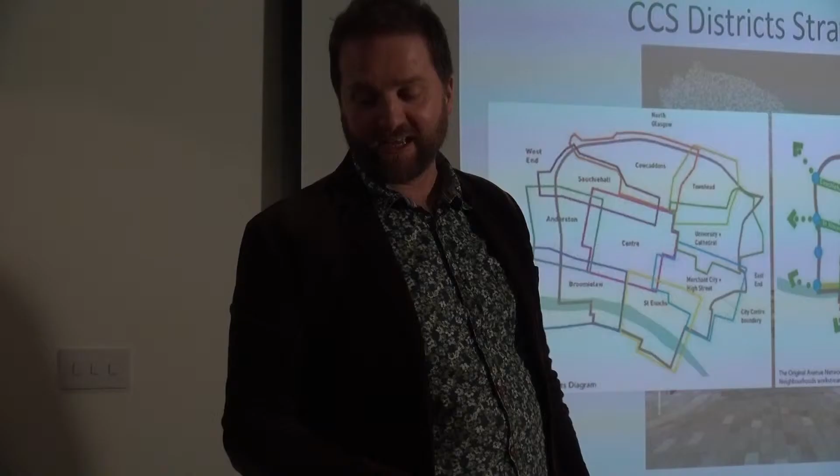If we come back to the origins of this project activity, it actually stems back. These are the original drawings from a workshop in November 2012 that we held, and these formulated a workstream report that was never published, that then became one of the foundations of what is, sorry, this is a PDF, so you would have seen on the backdrop here the City Centre strategy document.

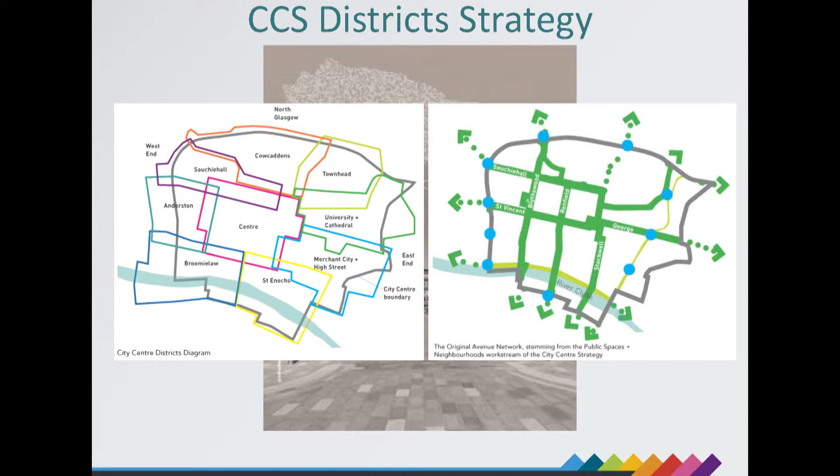So we actually work within the City Centre strategy 2014 to 19 document. That document and that activity looked at delivering 2 elements across the city centre. First of all, we came up with this concept of 9 districts. We're undertaking district regeneration frameworks for each of these districts.

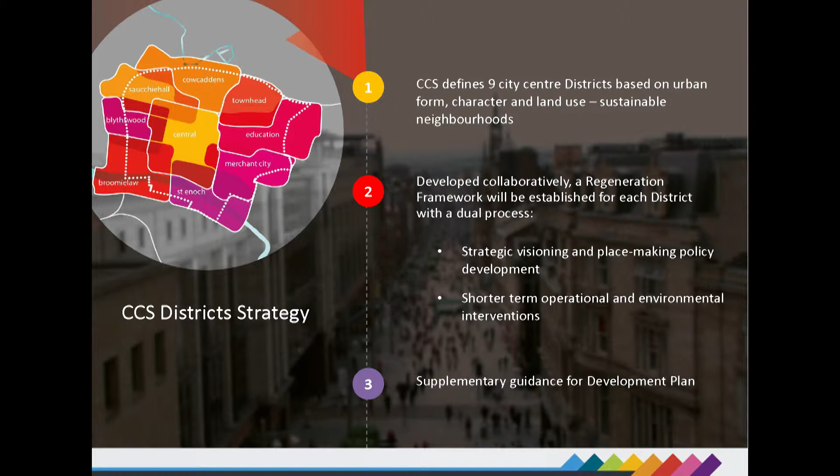They feed into the local development framework, strategic development framework for the core city centre that then feeds into the local development plan. It's a very interesting aspect because it's the first time for us in Glasgow that we actually have a sort of operations infrastructure activity that's being coordinated but also working in parallel and in conjunction with the city centre strategy team, delivering on the placemaking, policies, strategic

drivers that then feed into the local development plan. So we have this meshing of practical activity on the ground that's backed up with all the policies and strategies at a city, regional and national level, certainly for the Avenues programme.

What that means, people-focused placemaking agenda, integrated with key strategies that I've just mentioned. We are fundamentally responding to investor requirements that pushed for an enhancement to the city centre. It's all about placemaking, it's all about improved public realm. By default, we're delivering on segregated cycle lanes, we're also delivering on green infrastructure, and we're currently delivering on smart

city infrastructure. What I mean by that is that we have a thematic project, the Intelligent Street Lighting project, where we are next month delivering on the LED rollout for the core city centre. That's 3,500 luminaires in the core city centre, but the important aspect is that we're also delivering on a central management system, which by default is a secure wireless canopy.

So that provides us with the secure comms network that allows us to plug and go with a myriad of sensors or do what we like. In essence, we have a network where you could in essence control all the street furniture, movement of traffic, etc. within the core city centre. We're not going to do that, that's a wee bit too far at the moment.

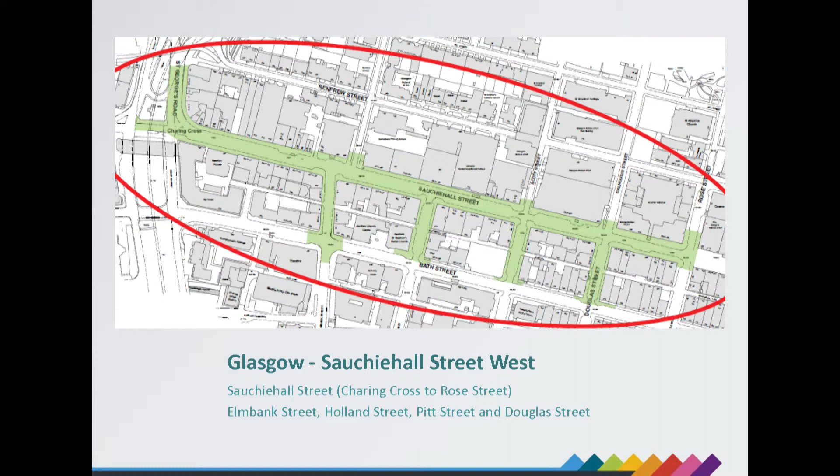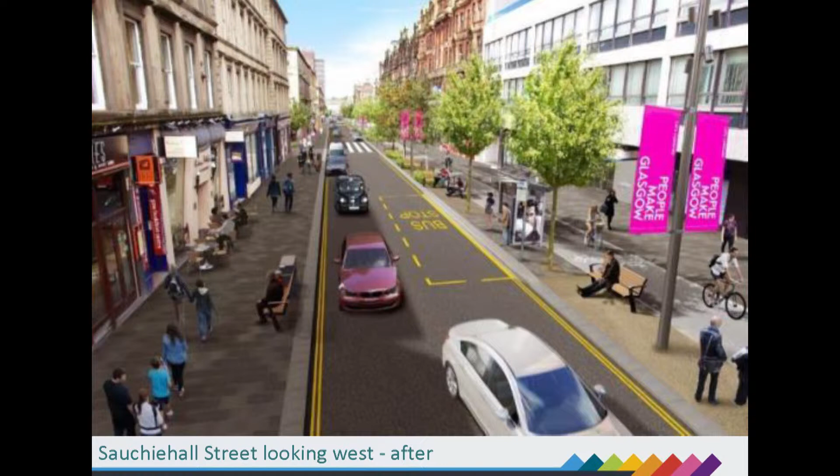That is what we were faced with. People have forgotten that image already. Going back 3 years, the key element is the white line in the middle. What we suggested was 4.5 metres of footway, 6.5 metres of carriageway, 3 metres of service verge with street trees, 3 metres of segregated cycle lane, and 4.5 metres of footway. That's what we pushed for.

Our game is all about space reallocation. We're trying to win back the space of the streets with the hierarchy approach: people first, cyclists, public transport, then everybody else. So that's what we proposed.

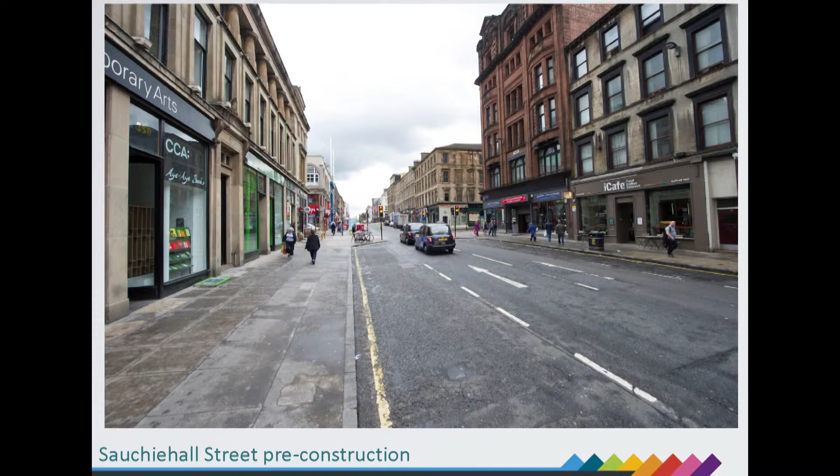Apart from, some of you would have noticed we skipped on the rain gardens - that was a step too far. I had to accept for my wider colleagues in the Glasgow family that this is a journey we're on, and this was the first avenue, the pilot avenue.

So rain gardens was a step too far, but we did introduce something called drain joints - we made the Caithness flag permeable with the joining between the slabs. The trees have 18 cubic metres of uncompacted soil below ground. The rooting zones start just short of the curb line and come into the cycleway, now by default continuous trenching on each block where you see trees. That is a major win for this city.

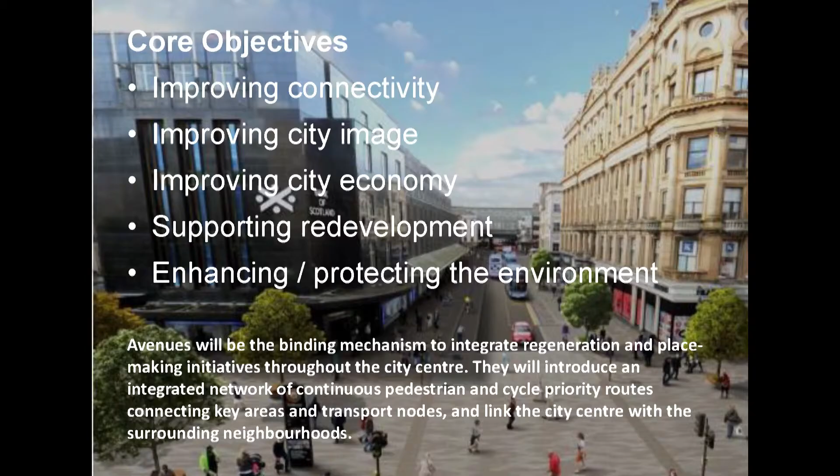Buchanan Street is still second only to London West End in terms of retail spend profile, yet we're facing about a 20% drop in spend profile over the next 10 years. So it's fundamentally important that we enhance the experience of the city centre so we maintain the volumes of people coming in and staying for restaurants, pubs, culture, and ultimately spending more money.

So when we suddenly got the 115 million - and it wasn't as easy as I'm making it out - it was a 3-year process of going through, narrowing down from 80 odd projects to about 20 that finally passed the post for funding.

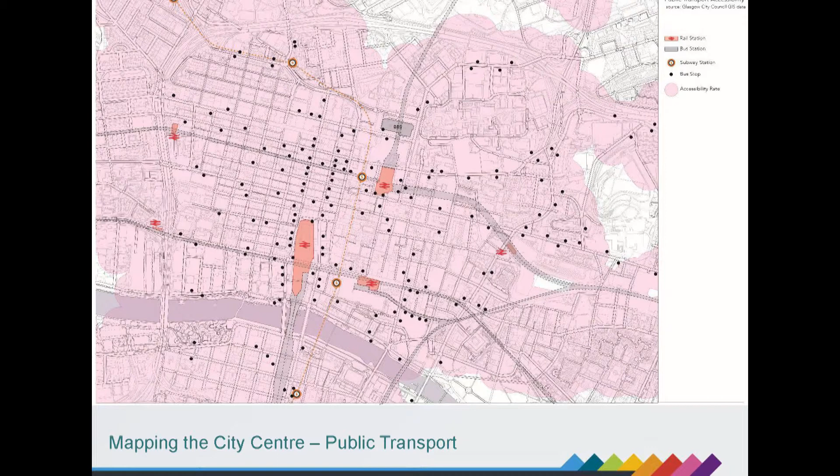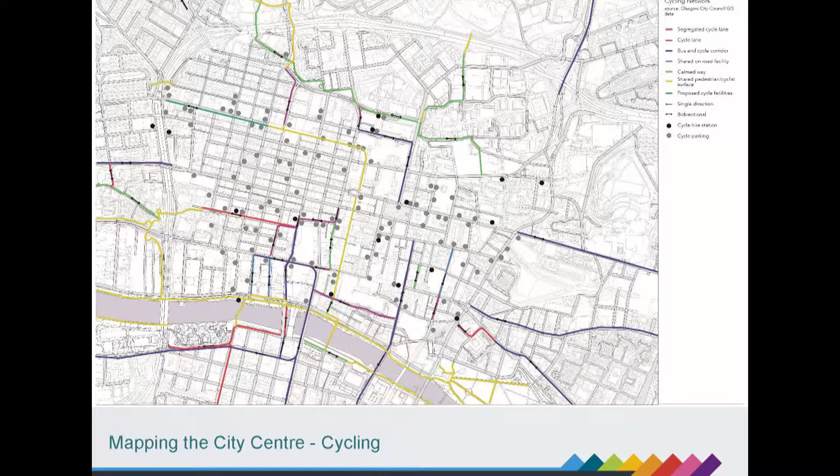We actually did something slightly different. We stood back and asked: what have we proposed, how are we going to deliver this? So we engaged Urban Movement, who looked quickly at the city centre environment - public transport, cycling, buses, air quality, and a whole myriad of factors.

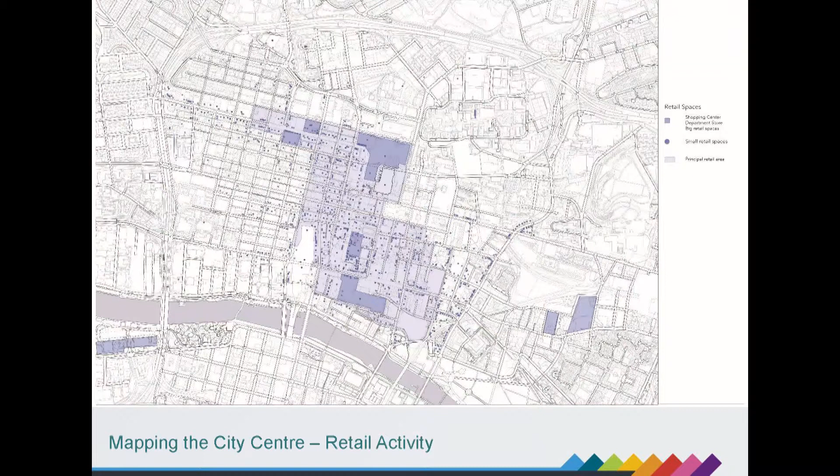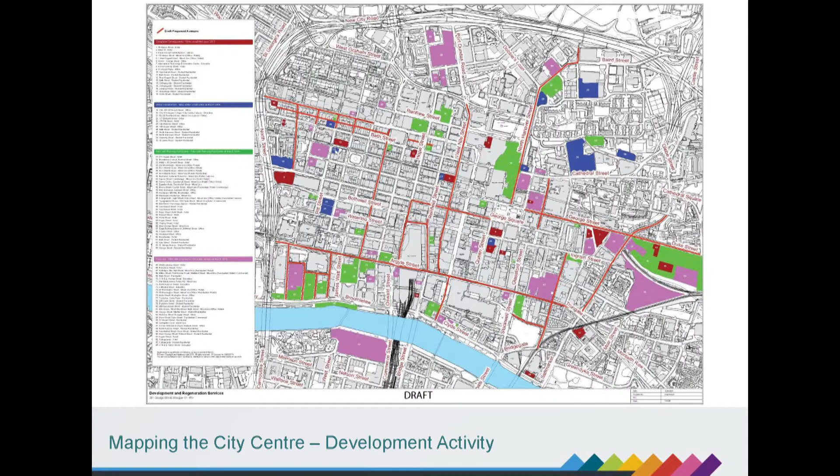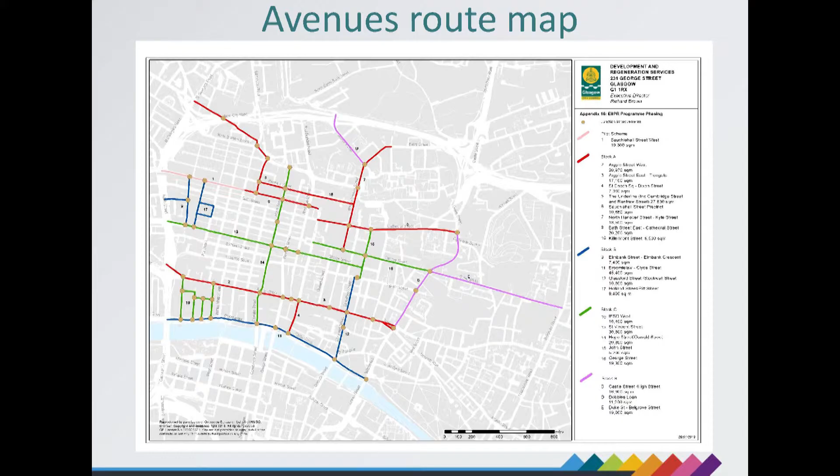This is from 2014 with some key avenues under the city centre transport strategy, and finally today - apologies for this poor slide - that's what we now have. Everything in blue, red and green is being delivered, and the extra purple, which we've added, with one missing here, is subject to an external funding bid - a sneaky little bid to Sustrans for about 20 odd million. I'll find out in June if we're successful.

So, key actions - remember that: better streets for walking, cycling, attractive spaces to be in and stay in, and also, importantly, climate resilience. We are delivering on climate adaptation.

Very quickly, running through some design elements that come into play here: Healthy Streets. We're fundamentally delivering on the Healthy Streets agenda. This stems from Lucy's work with TfL down in London, now becoming recognised across the wider UK to such an extent that this year, 9th and 10th of October, the Healthy Streets Conference is coming to Glasgow.

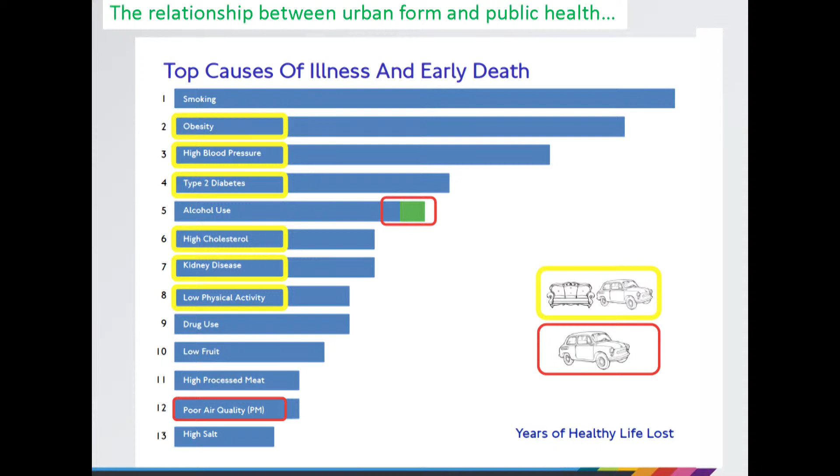A key element for me on the Healthy Streets agenda is identifying top causes of illness and early death. What's interesting is that obesity, high blood pressure, type 2 diabetes, high cholesterol, kidney disease and low physical activity actually equate to more than poor air quality and particulate matter. So following the Healthy Streets agenda and the delivery we're doing with active travel, we could actually hit many of these top spend profiles.

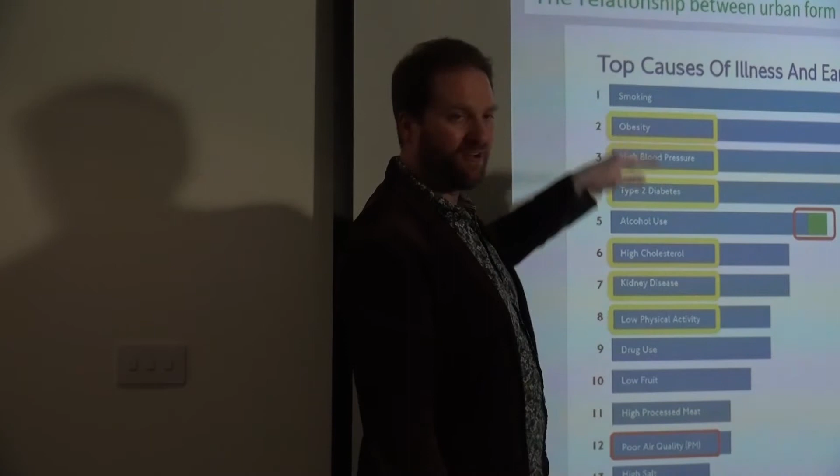This relates back to work done about 8-9 years ago by NICE, who first identified that for every £1 spent on cycling infrastructure, it would actually save £37 to the NHS budgets. So we're really pushing that messaging.

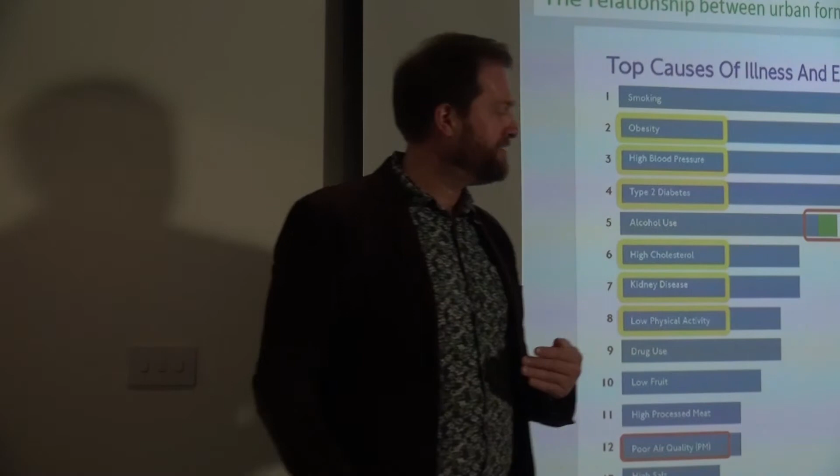Running on the back of the avenues, we have a £1 million NERC bid currently in process, which will allow the Institute of Occupational Medicine and Glasgow Centre for Population Health to monitor us over 10 years to see if we're actually delivering what we're intending to deliver, and our core ethos in terms of achieving that modal shift within the Glasgow context.

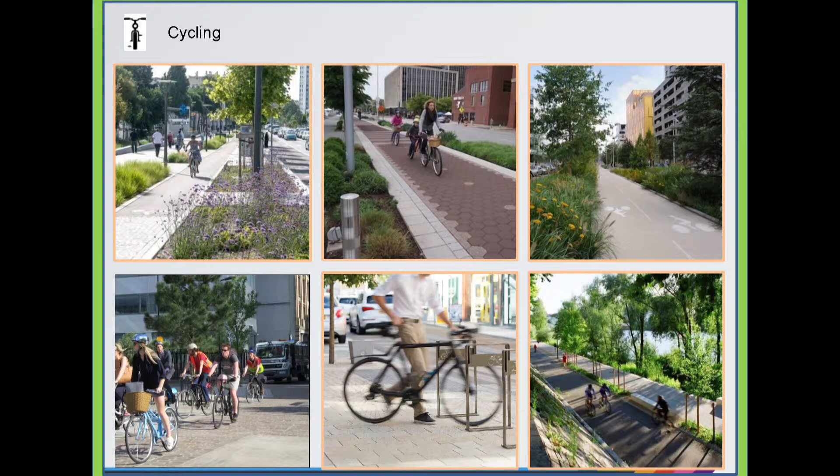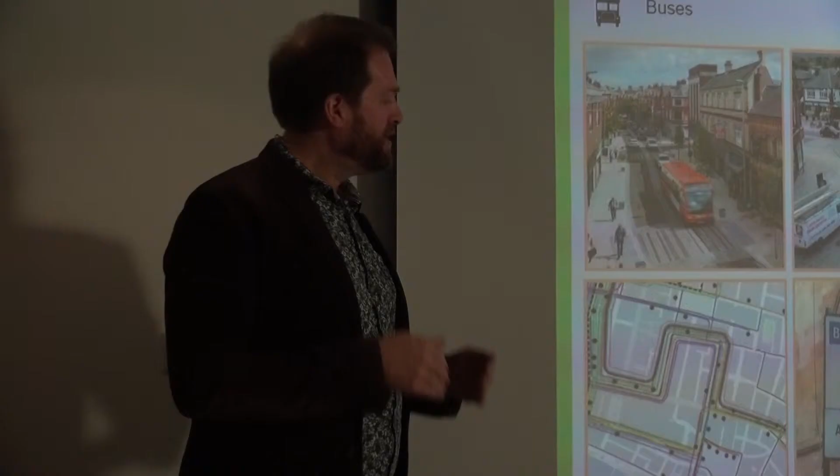Buses — it's so important that all of our work crosses over with the public transport network. We're not going to be like Edinburgh; I doubt very much we're going to get a tram. So it's the surface bus fleet that we must work with, improve and connect with.

Cycling, what works? There's a neat little report called SPICe published by the Scottish Parliament last year, and we focus on this because somewhere in there it talks about space reallocation. There has to be a willingness to reallocate road and parking space to cycling infrastructure. We take that further — cycling infrastructure, but also pedestrian first.

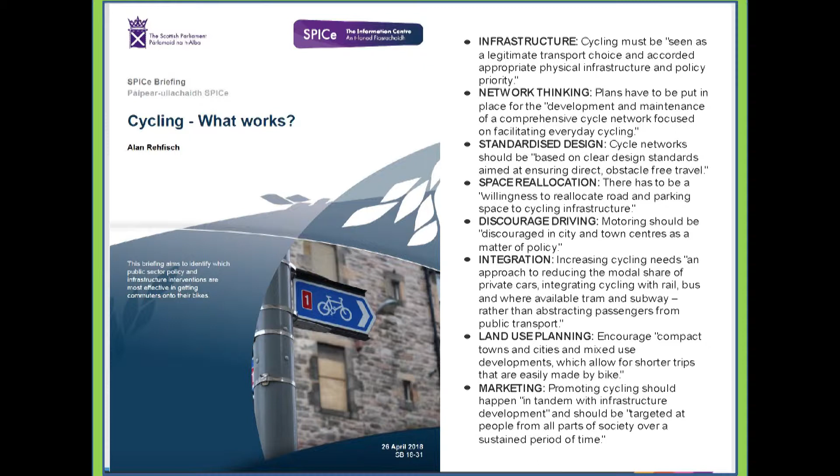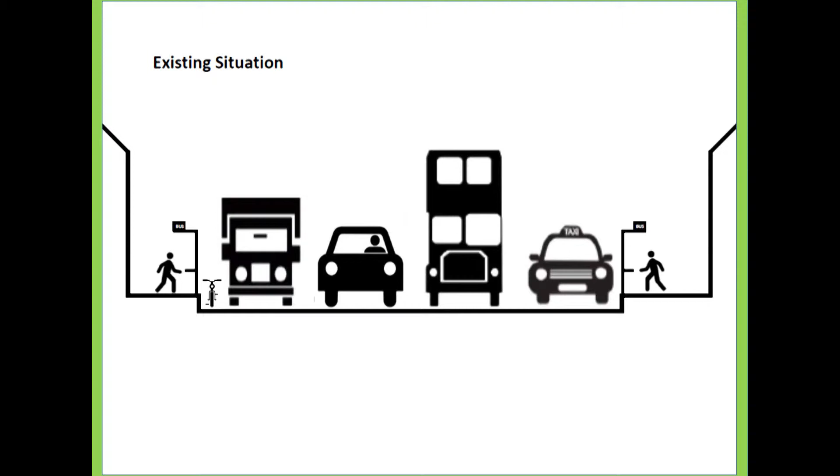This is how all these slides about speed, geometry, etc. work. Existing situation — this is from Argyle Street — and this is what we're taking it to, where we're narrowing it down. I have the go-ahead for the concept design for Argyle Street, shown on our website, glasgow.gov.uk/avenues, where we're demonstrating that we're designing across the board on the avenues for 15 miles per hour.

Now legally you can only enforce 20 miles an hour, but we're taking our design speed as being 15 miles an hour. Case studies — Poynton, 26,000 vehicles, you've seen all that strip I'm sure. Walking is a key element of our activity, as I've mentioned.

Street life. Design development — apologies, I'm racing through this. Design development, case studies, study trips, pilot schemes, following design standards and guidance, following policy, adopted design strategies, specific issue research, investigation — all of that is the activity that we're doing.

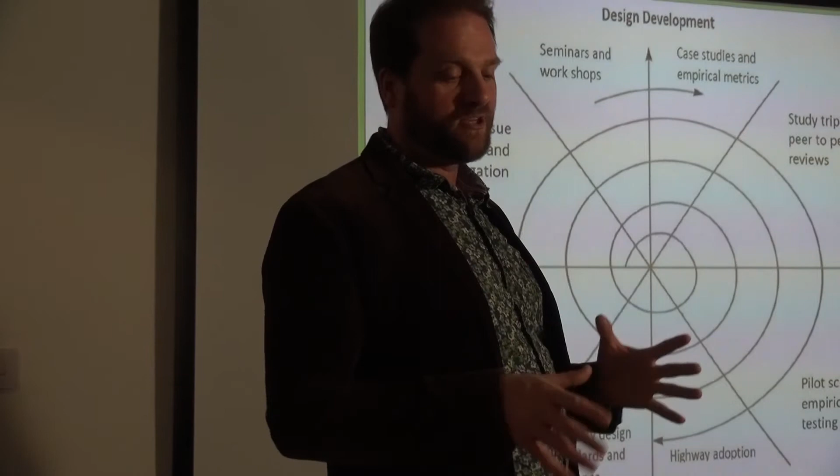I am not a road engineer and I'm not a designer. My professional background is ecology — I'm an ecologist as a professional, but I've had quite a number of years working in development activity. So for me, simply because of my own background, I rely totally on guidance and evidence. Every decision we take within the Avenues programme is evidence-based. I ask everybody to follow respective guidance and respective evidence.

And it is actually out there, because the nuances in a lot of our discussion and debate with our collective teams, even within the design teams, let alone our colleagues in the wider council service, it's all about the nuances of interpretation of that guidance. Because the guidance is there to deliver what we are delivering within the avenues.

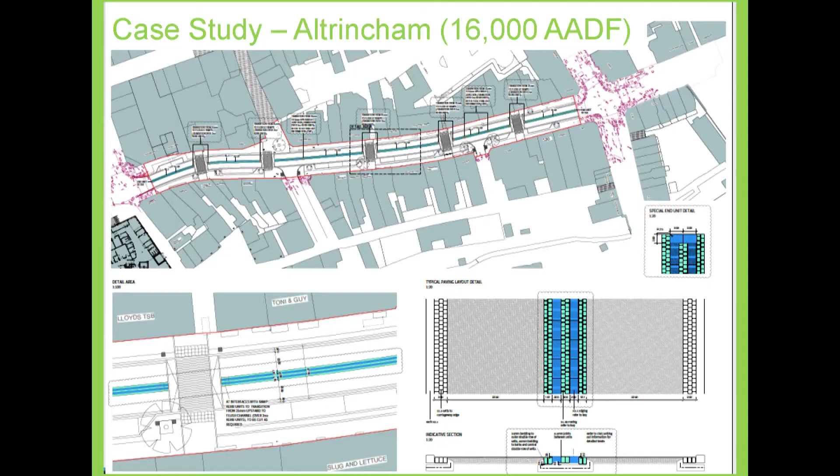Altrincham is a good one — a 6.5 metre carriageway in Altrincham for about 16,000 vehicles a day. I mention this because the proposal for Argyle Street is that we're taking the complete length of Argyle Street from Junction 19 to Glasgow Cross, actually to Moir Street beyond Glasgow Cross, down to 6.5 metres of carriageway. That's it, end of story.

And like Altrincham, it'll have a central rib, so we're telling the driver you have to slow down even further. So that concept design is now being taken forward for stage 3 and 4.

A key element for me is inclusive design — we're designing for all. So we've had discussions and debate with various vulnerable user groups, and we've set up an overarching steering group to undertake the equality impact assessments. These are members of that team. So quickly, I've mentioned Argyle Street.

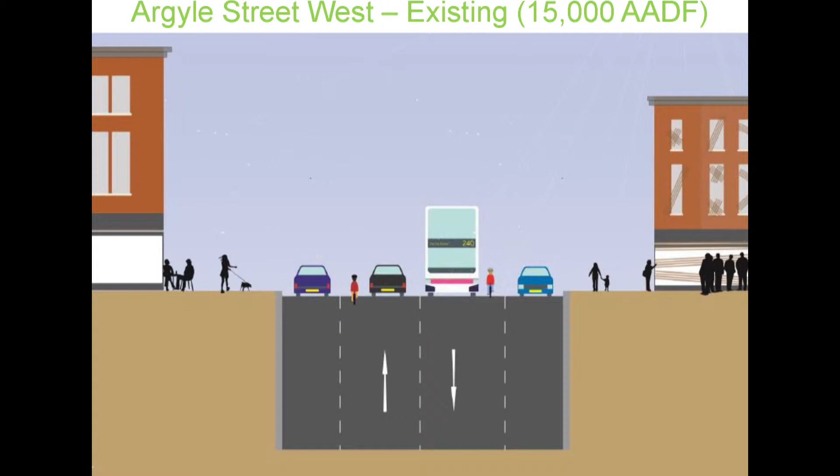That's what we're looking at doing. What does that look like? This isn't such a great visualization, they're being updated.

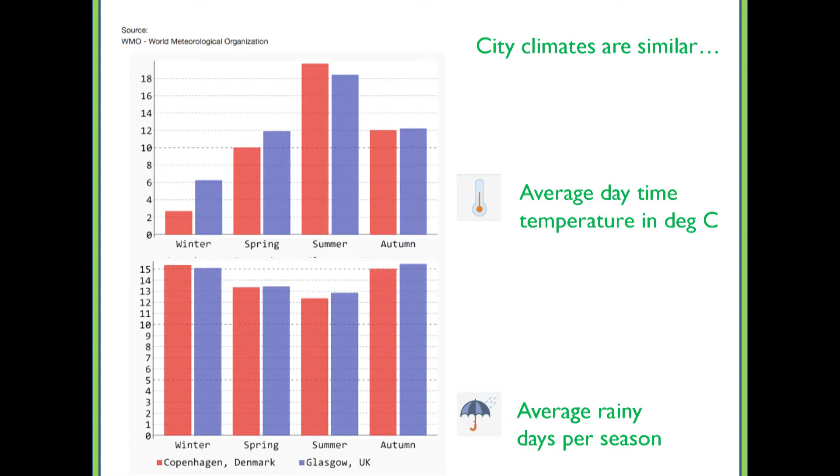It's important for me that we're designing for all streets, for all climates, for all seasons. This is just a comparison of Glasgow with Copenhagen, which is an obvious comparison. We're very similar. Climate resilience is a key element. Argyle Street will have rain gardens.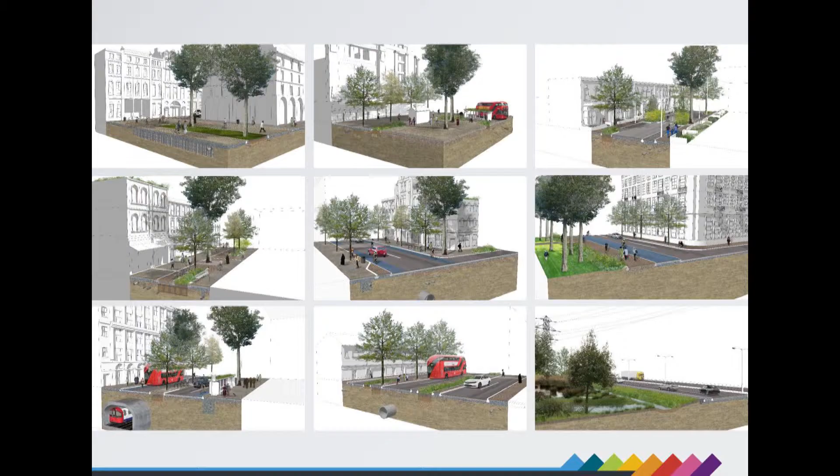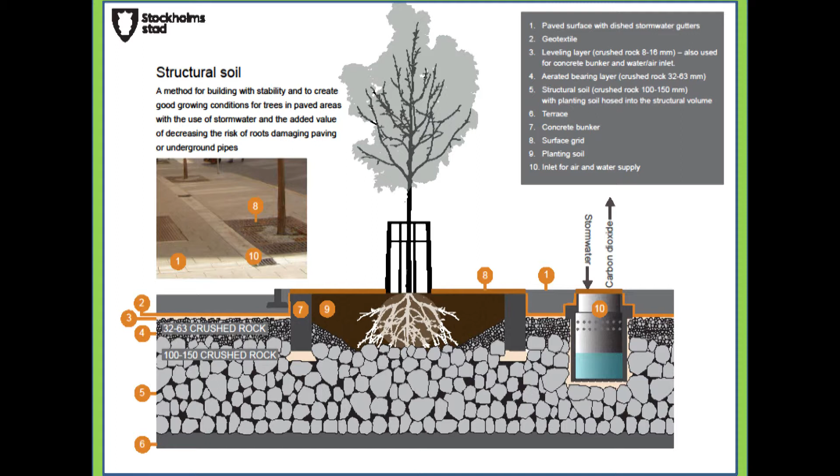We're looking at permeability. SUDS ultimately is a key important aspect, and we're now looking at that with the tree pits as well. Yes, we will be using uncompacted soil methods - the green, blue, urban, deep root, etc. But we are also looking at Stockholm soil, structural soils, so it'll be a sort of hybrid between the two.

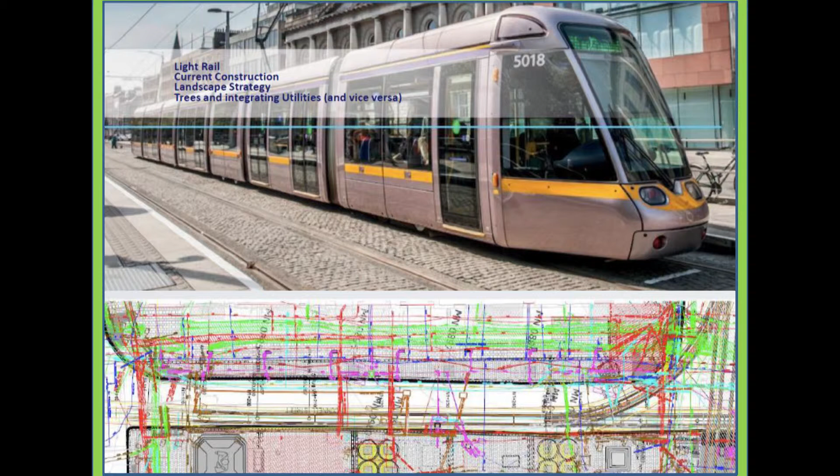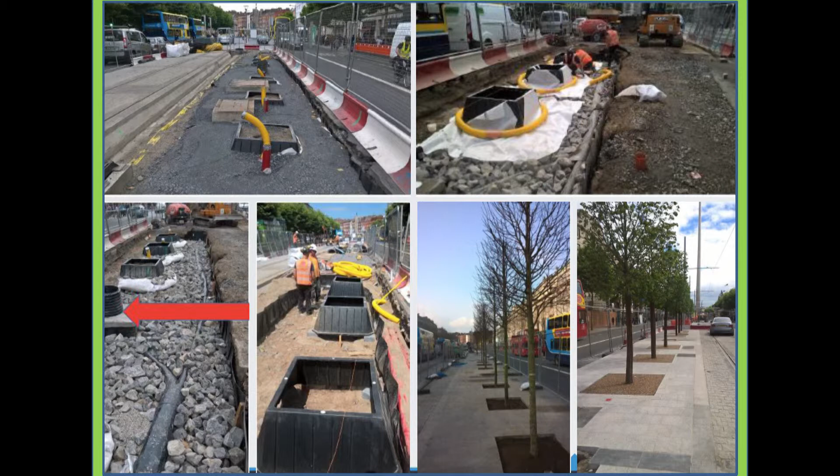There was a query on structural soils, so we took the guys to Dublin to look at a 78-ton tram that runs to one side of tree pits that are all used with a compacted soil approach. It simply comes down to, for us, we design for the location, and there's an opportunity that on elements of the avenues we'll have to use proprietary kit to create the rooting zones, but on other spaces we'll be able to use our method of structural soils.

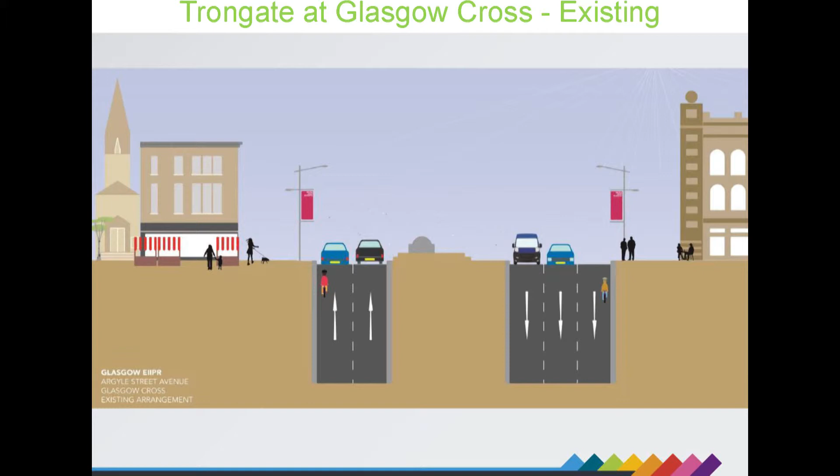This is Trongate, this is Glasgow Cross, this is what it currently is, and this is what we're proposing. We're actually taking London Road completely out from roughly Albion Street all the way back to Moir Street and Calton Barras. We're making everybody go onto the Trongate, which will then become two-way traffic.

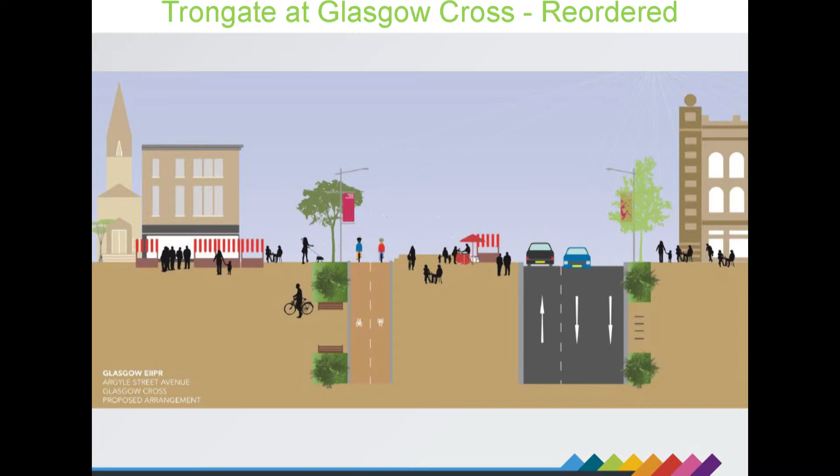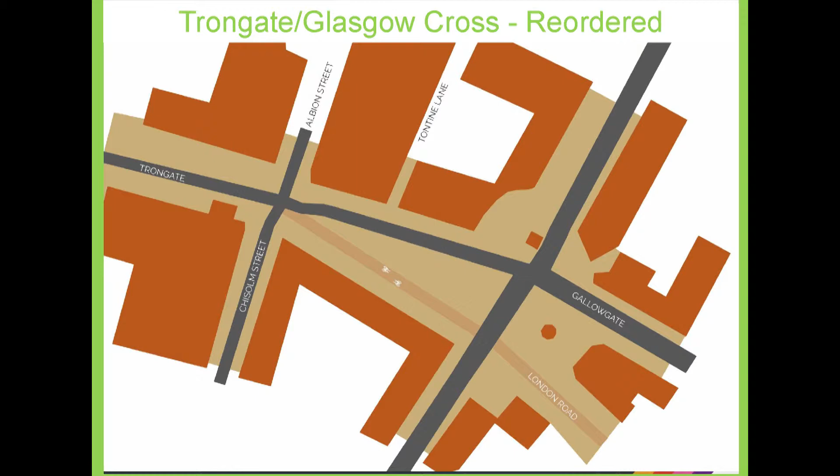What does that mean? Well, it means that I can take this really scary space of currently Glasgow Cross and make it look like this. And it actually works. This has all gone through - I'm not just drawing this up, scribbling it on a notepad. This has all been through the Paramics model, the transportation model, etc.

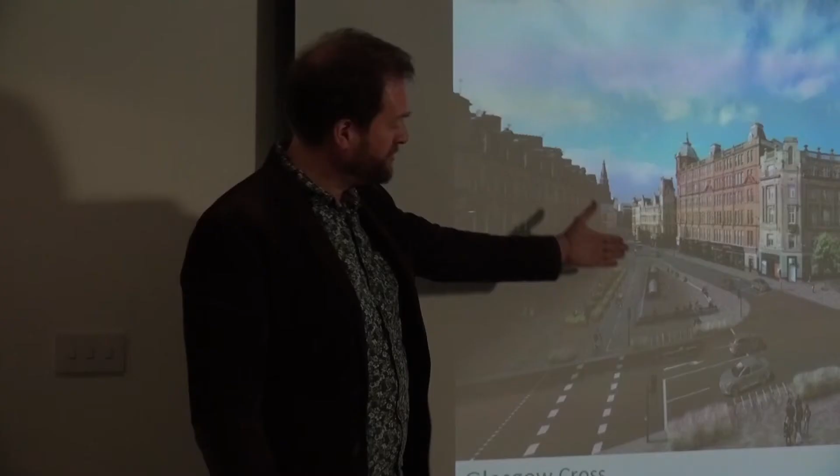This works. And that means that we can create a completely new radical environment, that we can give the tollbooth the setting that it deserves instead of being a traffic island. And we can introduce greenery, rain gardens, street trees, etc., and introduce this completely new public space.

So all exciting stuff. Very quickly, just to lead into the guys in the underline - this is a visualization for St George's Cross. And we've even found a statue of St George. There is one in Glasgow.

The underline basically runs from St George's to Cowcaddens subway stations. But here we're looking at simplifying, we're looking at maximising for pedestrian and cyclist movement. So this is quite a neat little activity, and this is now being taken forward by Laura and Kira at Benton Scott Simmons in association with Urban Movement and Civic Engineers.

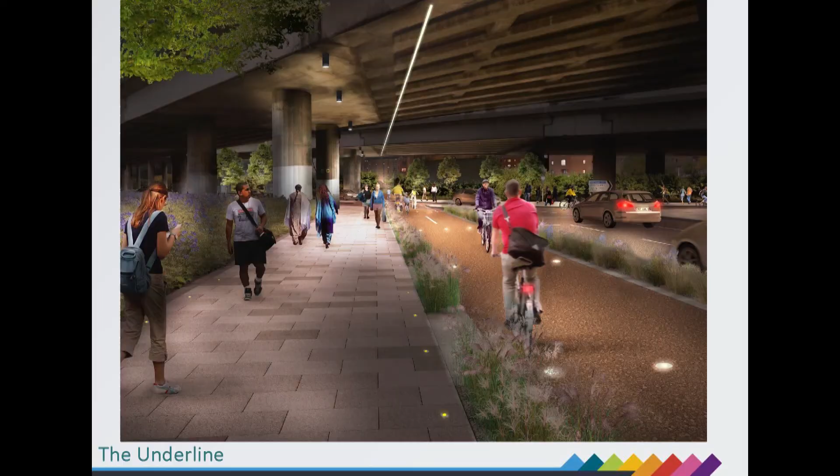This is the proposal for as you enter Phoenix Road. Now, this isn't as wacky as it seems - this is the undercroft of the motorway. We're working with Glasgow School of Art, who have Stow College, so I need a bit of land from them that they own, so we're going to buy that off them.

And on the other side, they're talking about an art gallery - removing all the walls and the barriers and providing a space for their students to put art. No idea how that's going to work down there, but we're providing the opportunity.

All we're doing is shunting the junction further to the right so that we can create this straight line from Great Western Road that comes right through Phoenix Road, through the bit of land from GSA and on to New City Road, and then it hits Cowcaddens and Cambridge Street.

So you can already walk this if you wish, but we're going to make it so that you do want to walk this. This will be one of the key routes into the city if you're a pedestrian or cyclist. And then you'll jump up onto Cambridge Street.

Now, I don't know how, but at the moment, if you're a cyclist, you're meant to be in the cycle lane in the middle of the road. I don't know if any of you have done that - I've sort of crossed over the road and I'm thinking, really? Is that where I'm meant to be, with traffic on both my left and right?

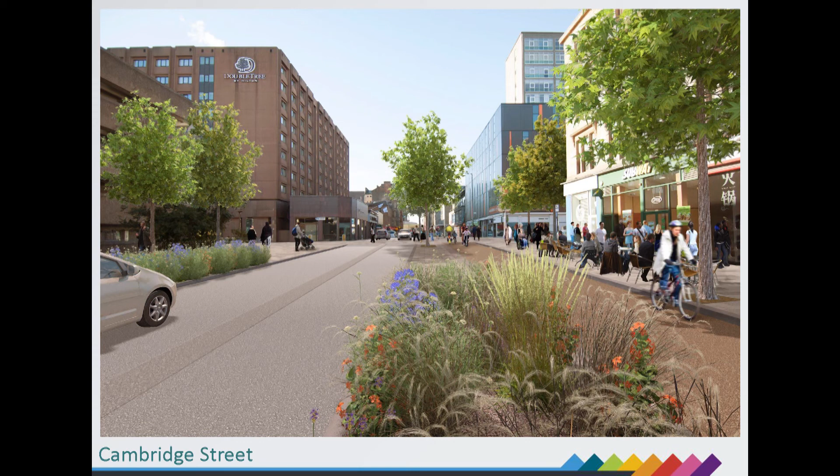So we're making it more appropriate, more back to what people would anticipate - a two-way carriageway, rain garden, segregated cycle lane, enhanced public realm. So it's very much the formula that we're taking forward in all of these avenues.